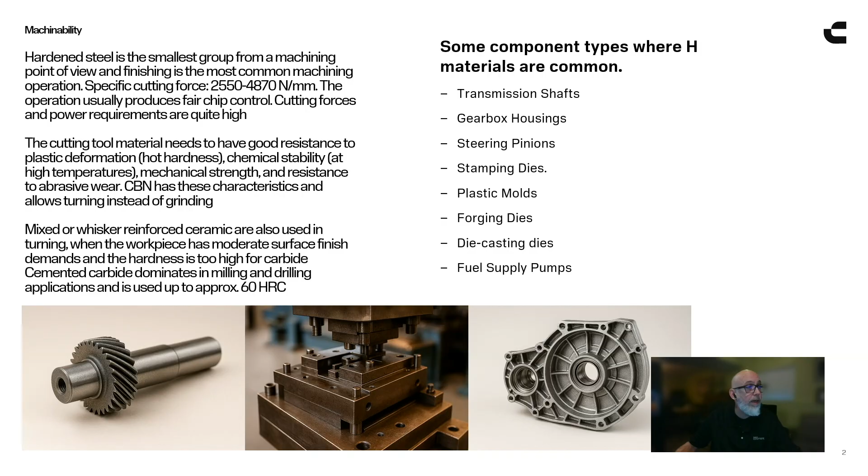Moving onward from that, we talked about how important it is to have that sharp edge, but also how important it is to really feed that lightly. And let's just say that, well, we've got to do a slot. So if you were putting an end mill through a piece of regular ISO P, maybe 1018, you could theoretically full slot that. You're not going to have too many difficulties. It might not be the best way to do it still, but you could get through it, right? If you try that in this heat treated material, you're going to generate way, way too much heat. It's gonna work harden the material. You'll have almost instant tool failure.

So we want to really emphasize that light cutting action, and that could be done by using trochoidal type strategies, stuff like that. But always remember light radial, light feed, higher speeds, and let there be room for the chips to get out. Let there be room for the tool to actually traverse that profile instead of just full on bury into it, where that heat's going to become a really big issue.

Some other points that are really important is, it also sounds counterintuitive, right? With all this heat we're generating, but you'll probably find better results if you turn the air blast on. Whether that's through the spindle or surrounding the area, you want to have that. It's a much more controlled temperature regulation. Think of the heat that's generated when you're cutting this material. You've got that cutting edge. It enters into the cut. It instantly goes up to probably around 2,000 degrees Fahrenheit, and then it comes out of cut, and then you've got coolant bringing it right back down to ambient temperature.

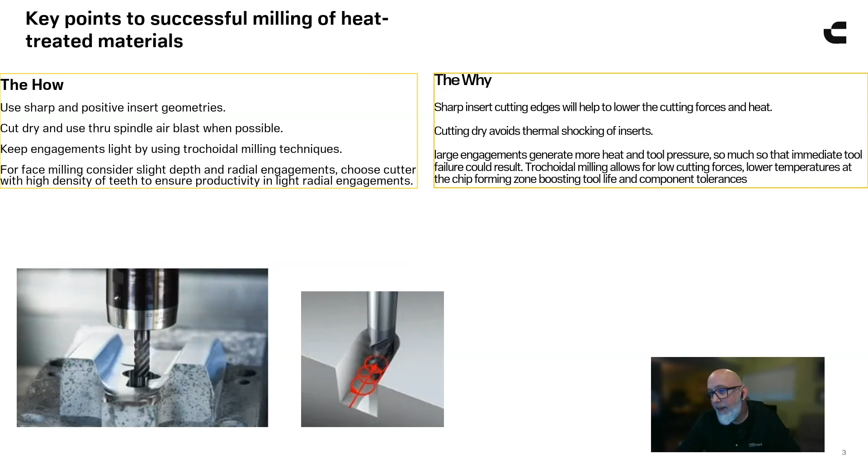And now, depending on your RPM, think about how many times that happens per second, and it's a lot. And this is what really tears apart that carbide mixture that we're talking about. And so what we found is by running air, the tool gets hot, but it's regulated, and it stays at a constant temperature. It avoids the thermal cracking that we see along the cutting edge. Once that thermal cracking starts, you really start to deteriorate the cutting edge right away. And in these types of materials, you've got to have that sharp edge to keep the heat down. So it's like a runaway train at that point if you're not controlling it.

So try it with the coolant off. Everybody feels a little anxious about that, but as long as you've got that light radial engagement, those lighter feeds, you're going to be good, and you're going to see a difference. You'll see a big difference. So wanted to talk about that.

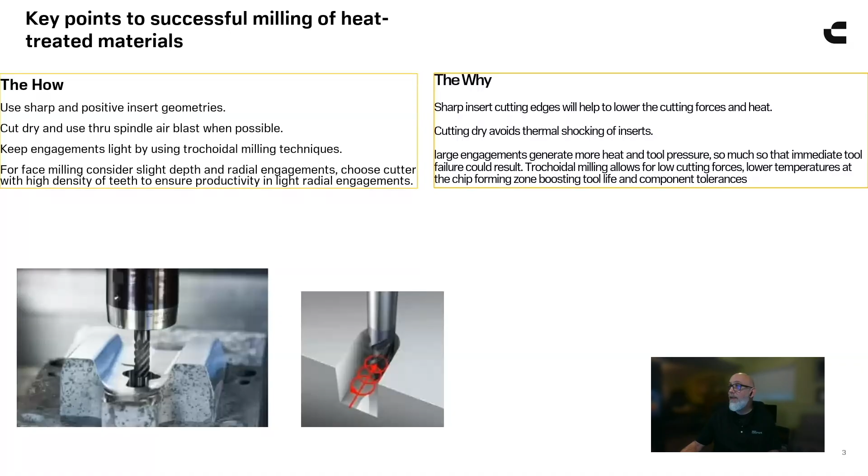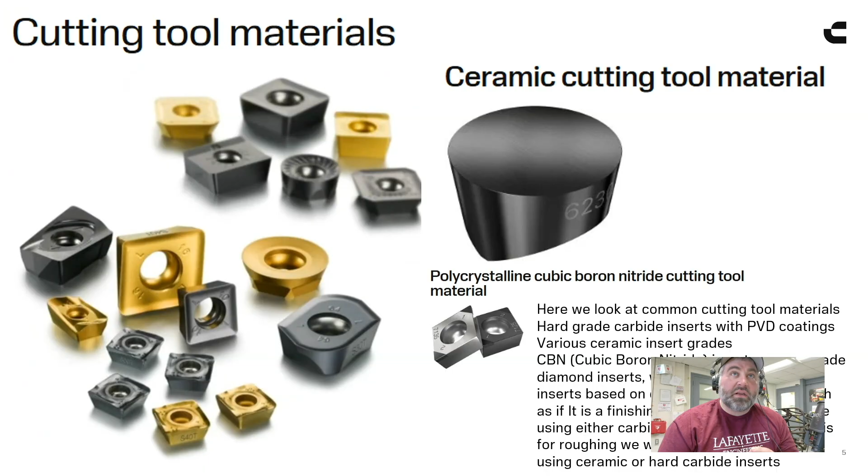Yeah. So I've been writing things down as you've been talking. We talked at length on a video call before we had the show, and I got a lot of my questions answered. But in your presentation here, your catalog page has the HRC levels. Is that something that could cross-reference to, say, the Machinery's Handbook or the Carpenter steel book? I think it would be. There might be a little bit of an extra challenge here to decipher our MC code versus some of the other codes out there. I do believe this has become an industry standard now.

Okay. It sounds funny. I haven't opened up a Machinery's Handbook in quite a while. I lived by it, my thumbs through so many pages. I've worn out some corners. Sure. Well, I found when I was a programmer, I had it at the ready all the time, but in this world, it's a little bit different. We have a lot of our own internal resources that we use as well. So I'm sure there is probably some type of transferability or some translation of those as well.

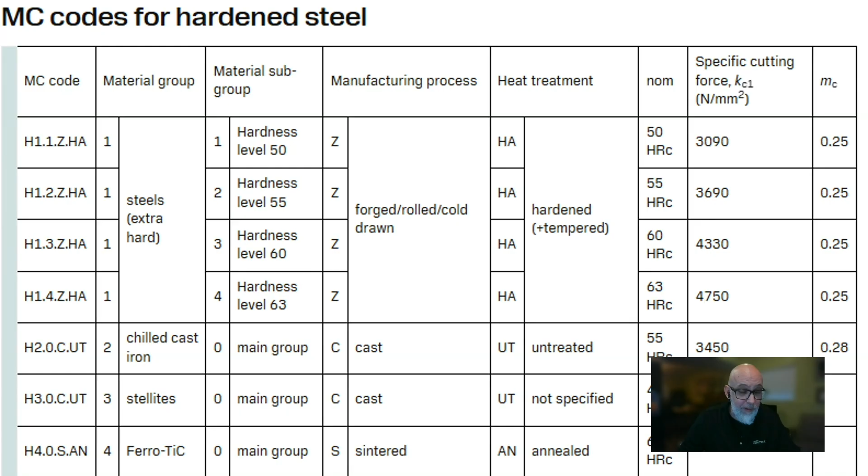When an insert is pressed, think of any kind of die and mold situation. There's typically a flashing that's produced around the seam of those two units that come together and press, and that's how inserts are made too. In the past, the industry standard created a lot of flashing, and in a place on the insert that's not very advantageous. It was right on the cutting edge. Because of that, we would have to peripheral grind these inserts, or put them through a brushing process or some type of edge honing process before they could get coated. It added an extra layer of complexity to the manufacturing, and it also added an extra layer of cost.

Since then, we've come up with new ways to press inserts that are pretty fantastic. In fact, it avoids the flashing altogether. We can typically go straight to being sintered and coated. We can avoid a peripheral grind operation on these inserts and still achieve the same results as with a ground insert edge, or even better results. So that's been a big thing. This is a process security improvement, a productivity improvement, and also a sustainability improvement, because we've lowered the cost. We've made it more attainable to do it the right way, basically.

Along those lines is coatings. We do a lot with coatings. We've created new coating technologies where we can now do multi-layer PVD coatings, which used to be impossible. On top of that, we actually have processes for that coating that align the molecular layers with each other.

And when that happens, the strength of that coating becomes even more durable. So definitely we've got a lot of scientists. We've got a lot of, I call them the mad scientists, but they do a lot of great stuff, and they keep us at the forefront of providing these great solutions to our customers. So, yeah.

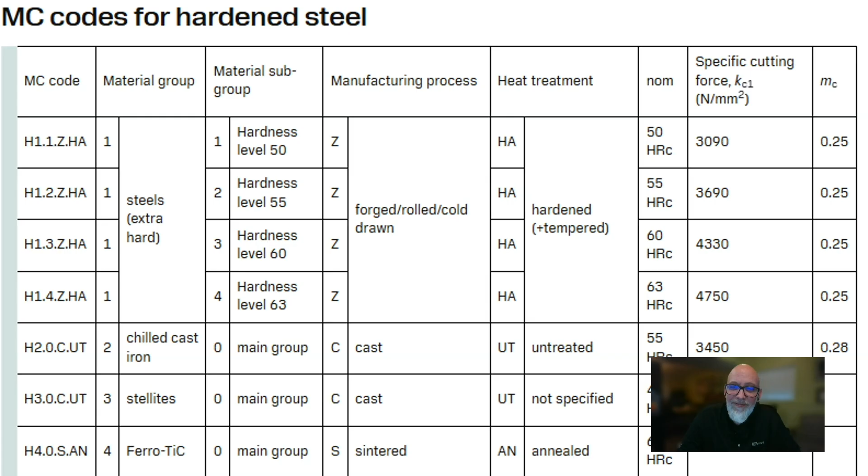Well, thank you, Robert. It's been our pleasure, and looking forward to another one, maybe. If you guys do a lot of turning inserts, I have a big turning month coming up. I'd be really happy to reach out to you again and have you back on. You betcha. Yeah, let's coordinate that. All right, John, again, thank you.